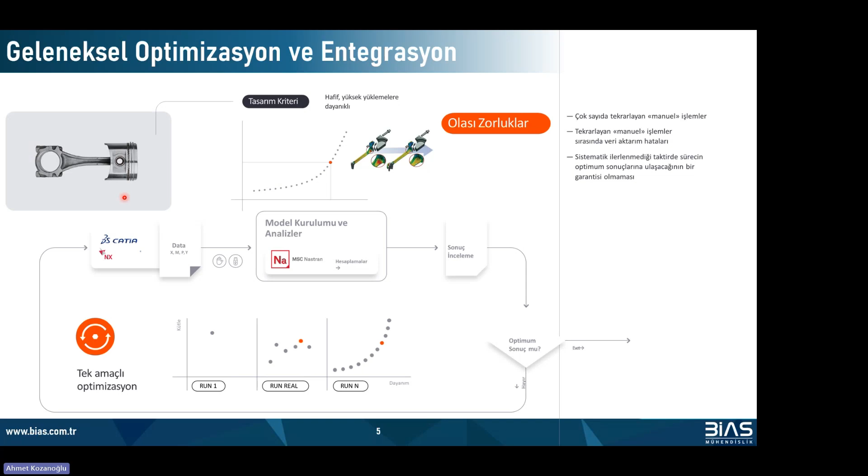Because of this, we can continue with modern optimization tools. If you have one requirement, one design criteria for your structure, you can do it the traditional way. But if you have more design criteria for your structure, you have to use some modern optimization tool. In the previous case we mentioned only one design criteria, but in this one we have two different design criteria. So for most problems and most structures, more than one output is examined for the optimum target of the structure. For example, for this problem, another output could be that it doesn't distort its behavior at high temperature.

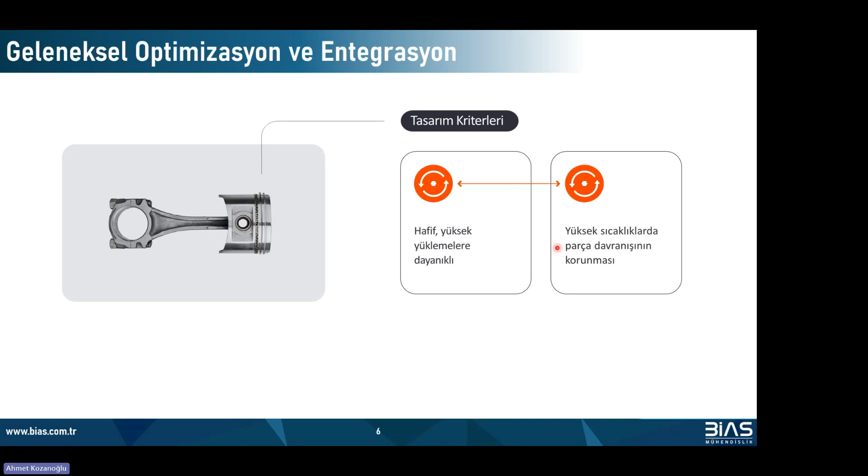So for modern optimization and integration, we are using pSeven software. pSeven software has three products: one is pSeven Core, the other is pSeven Desktop, and the last one is pSeven Enterprise. P7 Core can be defined as a Python integrated library, a program without an interface, and users can access and use all the algorithms and techniques in it. For P7 Desktop, we have 4 steps, or legs. Firstly, you integrate your workflow - you can use a CAD tool, a CAE tool, and integrate all of them into P7 Desktop. After integration, you can automate your process, and after automating your process, you can obtain optimum results.

For example, you want to decrease the mass of your structure, so you can get an optimum result. And you run, for example, 100 analyses in P7 Desktop - you can get 100 inputs and 100 outputs. So you can use this data for your prediction modeling. The last one is pSeven Enterprise, but in this webinar we will continue with the P7 Desktop version.

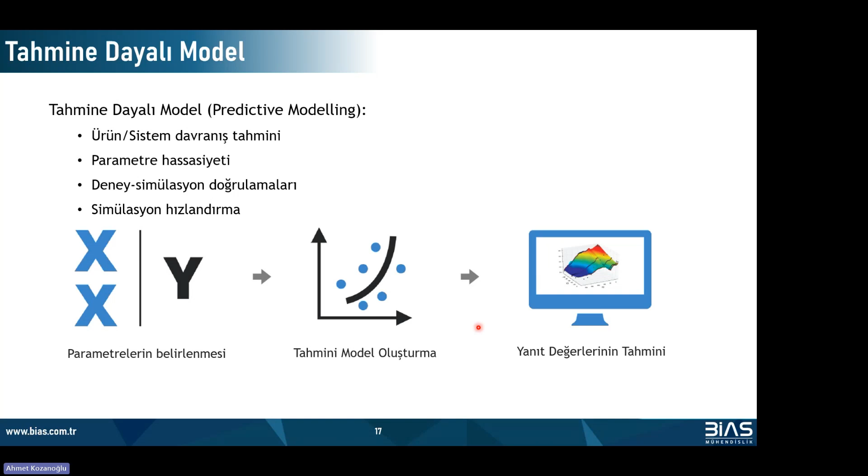Even if you have test data or lots of analysis data, if you have both input and output for your system, you can create a predictive model in pSeven and predict your results within seconds.

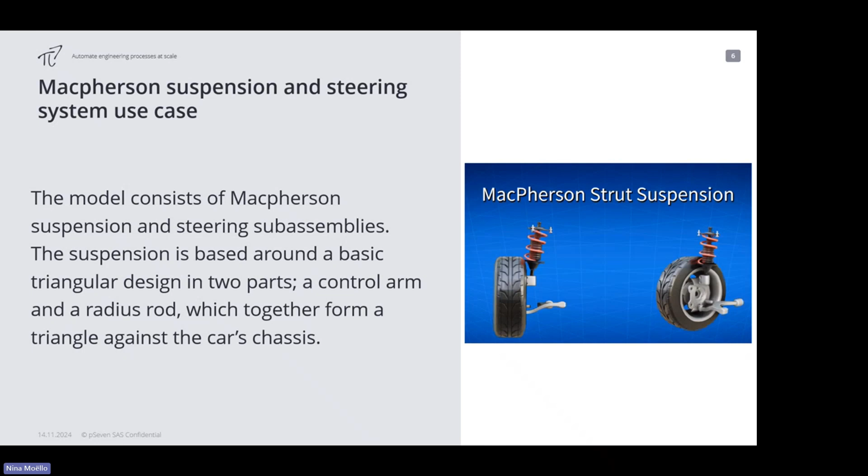So it consists of an assembly of suspension and steering. The suspension is based around a basic triangular design in two parts. So this is basically here. Okay, so we have a control arm and a radius rod. So these together form a triangle against the car chassis that we do not have on the picture. But this is widely used in the automotive industry, but still requires some refinements to be well designed and to provide some good performance to the car.

All right. So here you have another schema of the same tool, same system. And the objective for today is to provide, of course, a stable and safe car. And to achieve this goal, we have two different sub-goals, let's say. The first one is to minimize the camber angle beta, which is here. Okay, by minimizing this camber angle, it will allow the tire to stick to the ground.

Okay, so you have the maximum surface of the tire which is in contact with the ground. So then you have a more stable car. But we also want to minimize the roll center height difference between minimum and maximum values. So this is basically this distance here. And this one will enable us to have safer cars, or again, more stable and safer.

In order to play on those two aspects, we have 3 lower control arm points. Okay, so I told you that we are talking about a small triangle on this geometry. So this is exactly what you have, in red here and here on both parts. Okay, and the control arm points are those PF, PO, and PR that you have. So the front hardpoint, the outer hardpoint, and the rear hardpoint here.

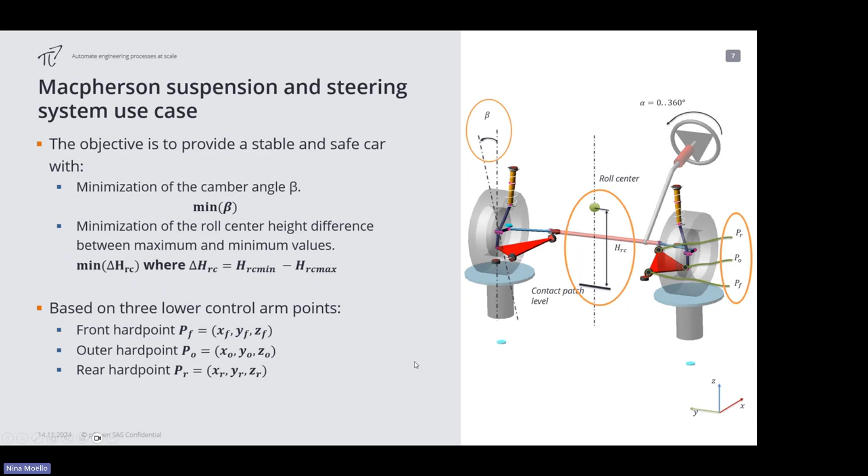Okay, and for each of those hard points, of course, we have the coordinates, so X, Y, and Z. In total, it means that we have 9 variables and basically 2 outputs, so 2 objectives. So with this, we basically designed everything in Adams. Okay, so the simulation was made with Adams Car, which provides reliable simulation tools to model this kind of system, so regarding the automotive industry.

But on Adams Car, the optimization capabilities are limited. Okay, it provides quite okay design space exploration and so on, but with pSeven, we think we can provide more than that with machine learning capabilities. We will see that right after. And on top of that, the problem here is multi-objective optimization. We saw that we have 2 different objectives with the aim to find the best compromise between those 2 objectives, which are conflicting criteria.

By conflicting, I mean that if one of the criteria is minimized, it's likely that the other one will increase, and vice versa. So we have to find the best combination of the 2 criteria to minimize them both at the same time. On the other hand, it has many variables. We saw that. We have 9 variables here, and it's too much for an engineer to search manually for the optimal solution.

So this is why we rely on algorithms and automation here. To close the loop, the industrial context now needs fast and reliable study results. You basically cannot afford a large amount of time to search manually for the answers and implement that slowly. So in this general context, the question is: how can pSeven bring value in solving such a complex task?

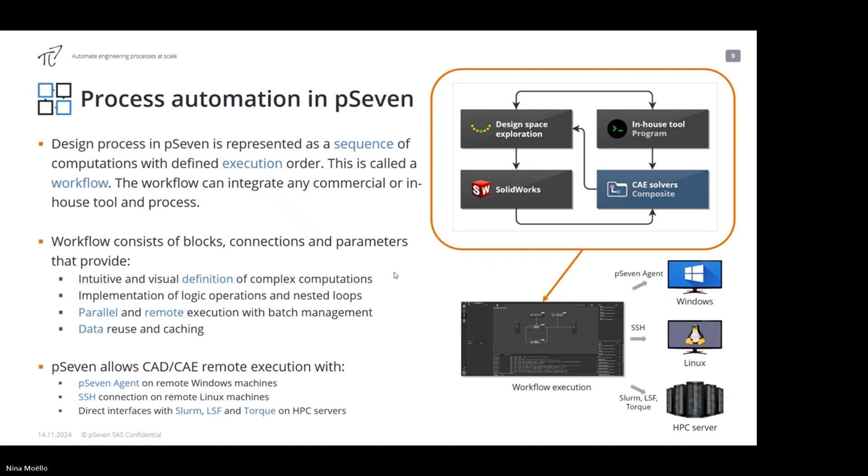So with this definition of process automation in pSeven, our goal is now to do the same with Adams Car. On the first step, the simulation was performed on its own with the Adams Car application, with the following settings for those who are interested. So basically, the engineer did a first simulation on Adams Car to set everything up.

At each simulation step, we are computing the delta H, this value here that we want to minimize in the future, and the beta value as well, so this camber angle here that is also to be minimized. You have those parameter calculations for one full model execution, and in the end those values are just computed for every time step, so we ensure that the model provides the good output.

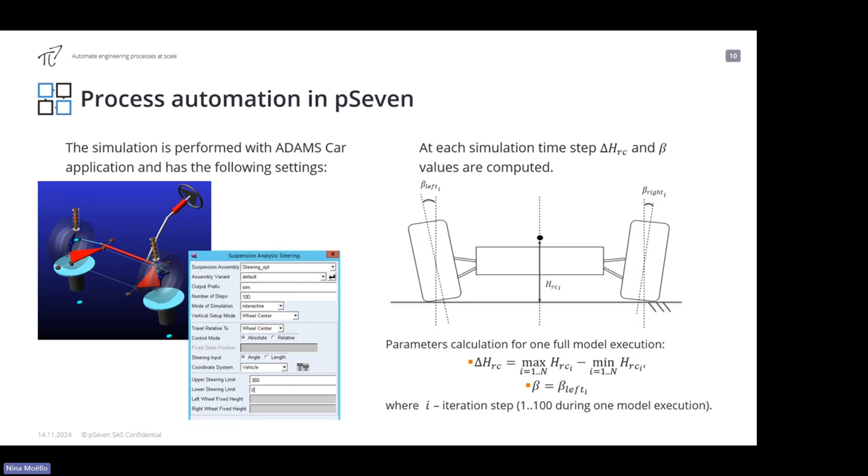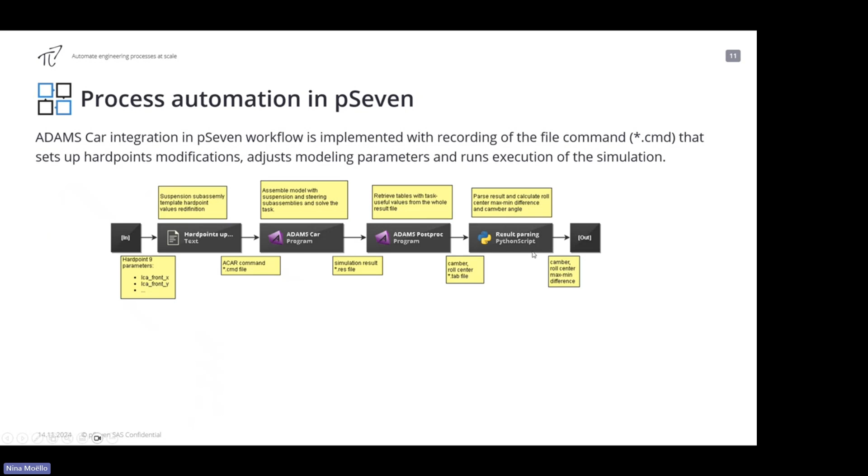And then we basically build such a workflow. You see here the workflow has a different shape. So your workflow can represent basically any engineering process, and you can be quite creative to customize your own workflow. Here in this workflow we have 4 blocks, 4 main steps, to integrate this Adams Car.

So let's start with the first two. Like Ahmet said, for simulation tools you can access different input files, and in our case the input file will be the CMD file. So we have one Adams Car simulation and one small file which defines the different steps of the simulation properties. In this simulation properties file, our goal is to redefine the hardpoint values, so redefine our front, outer, and rear point values, like you have here in blue, through some small commands.

This is done by the first text block with powerful text parsing capabilities, with a no-code process, so just by selecting your value with the mouse it will be changed automatically. Then the second block is the Adams Car program, which opens the assembly, the .asy file, and updates the hardpoints based on the command we just defined. So this is what is said here: all actions are performed in accordance with the predefined command file.

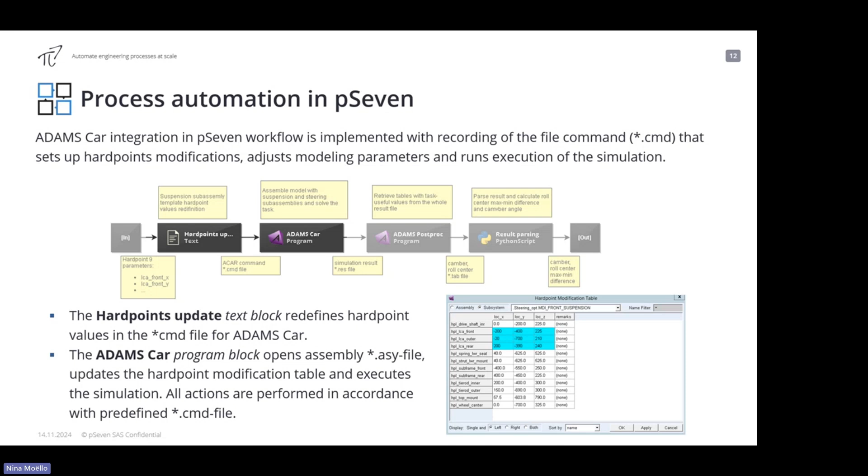pSeven manages the ADAMS Car execution. Once it's done, we then switch to the next blocks.

The ADAMS Car post-processing is made to export some tables with the task-related values, so this delta H and beta values, through execution of the predefined CMD file.

So again, here we just continue the process with some post-processing tasks. And in the end, we retrieve those kind of plots here, right? And with a small Python script, we are just parsing the results, computing the final value out of those tables, out of those graphs, to go back to pSeven with the exact value of delta H and beta.

So to summarize briefly the whole workflow: we modify the command lines to modify the input of the hardpoints. Then we launch the process of ADAMS Car. We post-process a bit to output those graphs. And by using those graphs, we then just gather the final value of delta H and beta.

So with this workflow, you basically have a standardized process which will take as global inputs your new hardpoint values and which will print as outputs the camber, roll center, and min-max difference.

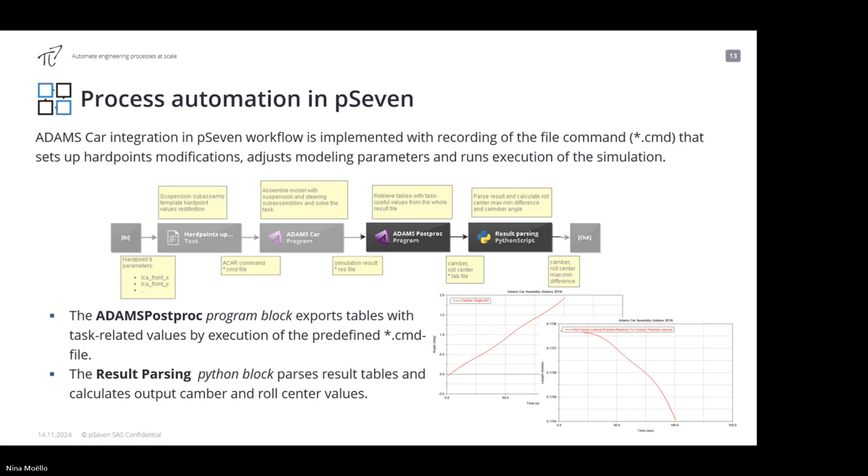This entire tool, or entire object, is just the automation of a complex engineering process. And it's also made to avoid manual and repetitive operations.

Because again, like Ahmed said, when you are dealing with manual operations, you are facing some human errors, just forgetting about one file or one value or misreading something. This is totally normal. But with pSeven here, we ensure that the process is the same for every task.

On top of that, the workflow provides a visual representation of the process. So if you want to share this project with someone else, this second person can directly see what has been done and understand more clearly without going into the details of the simulation.

So now that we have an automated workflow, our goal was to optimize this design. How can pSeven optimize such a task? Well, we have different algorithms and different techniques to tackle those problems, some including machine learning or more traditional methods.

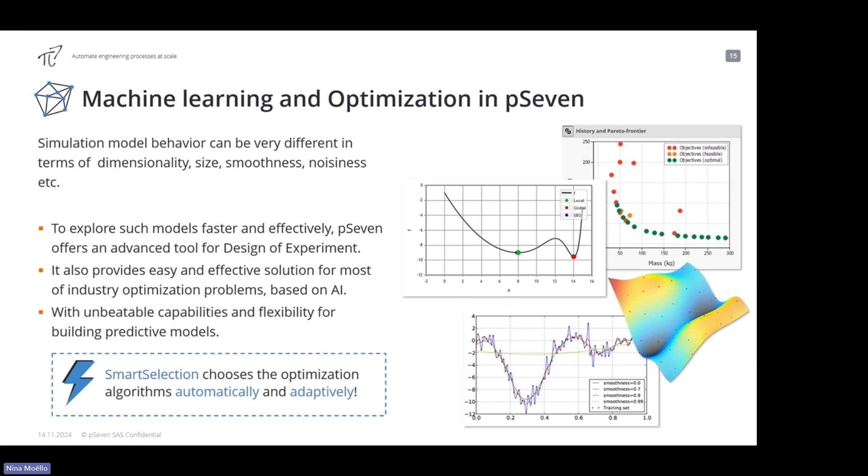We saw that pSeven is applied in different domains. So this is where this comes from: it's based on AI. And also it has unbeatable capabilities and flexibility for building predictive models.

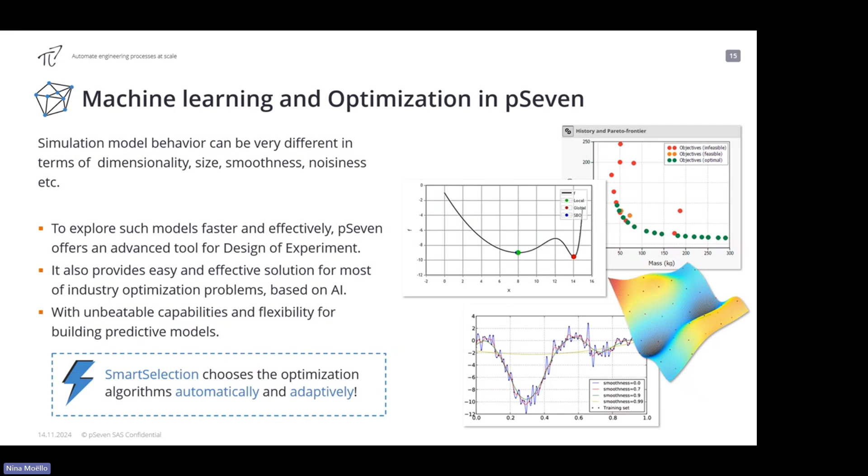This is not our goal for today's topic, but if you have some questions, I would be happy to answer about machine learning. And on top of all those capabilities, we have the smart selection, like Ahmed showed you, which helps choose the best technique if you're non-expert in mathematical techniques.

And to control this workflow now, we do not provide inputs from the user, but from pSeven directly, from the Design Space Exploration tool. This tool will also gather the results to have this kind of loop.

We are now in the evaluation mode, which means that we do not have any specific targets for those responses. So the smart selection algorithm provides the technique of Latin hypercube sampling, what we call LHS, to just explore correlations between input and output parameters. For the moment, we asked for 300 points.

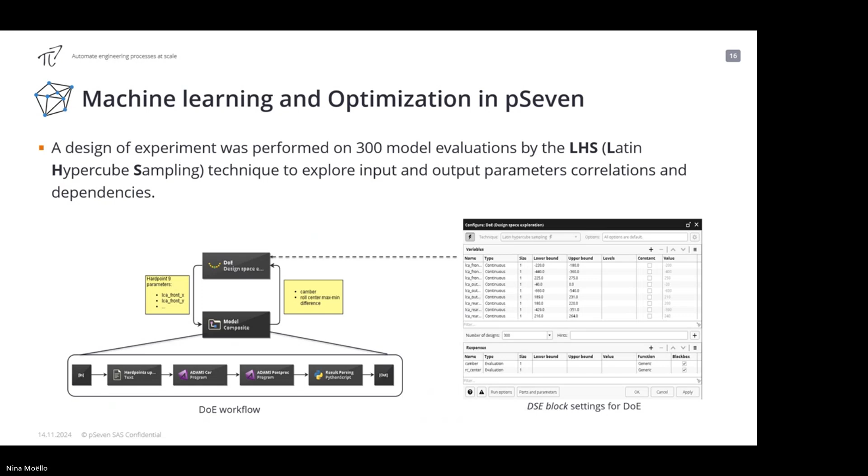Okay, so this kind of workflow is adapted for Adams Car. But at pSeven, we provide very different connectors. So those blocks relying on Adams Car simulation could actually be replaced by another program. So if you're using, say, ANSYS Fluent, we can definitely work with ANSYS Fluent with the same process. We are totally agnostic to any software, so we work with ANSYS, Hexagon, Siemens, whatever the software, even in-house software, in-house codes.

Can it be exe files or Python scripts or MATLAB, whatever? We can integrate any of them. Then just by having a workflow like that, which can automate your process, you can plug on top our algorithms for optimization, design space exploration, and so on. So yes, no problem with CFD.

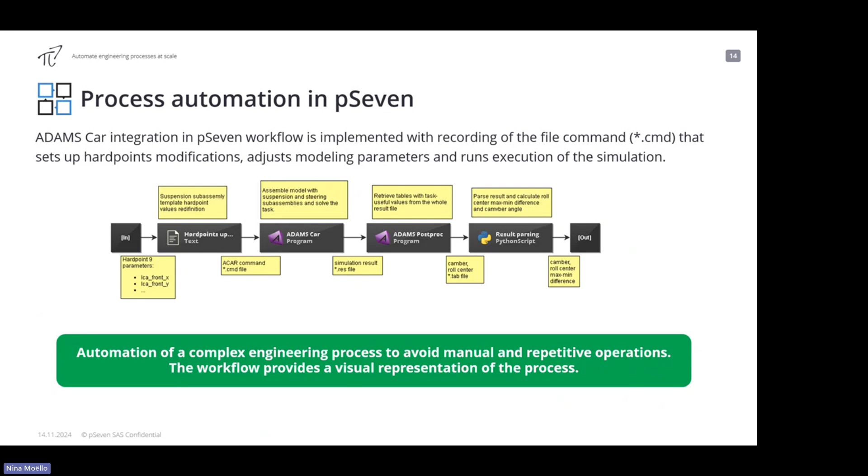So can pSeven work as a plugin for CAE and Adams? Sorry, let me exit to have a better view of your questions. So plugin in CAE or Adams integrate - if I understand the question, it means can pSeven be launched from Adams, right?

Yes, so not at the moment. We don't have any strong partnership, let's say, with Adams. Maybe they have a connector, but in our case, our process is to integrate Adams within pSeven and then to work from pSeven.

I think there is no question in the chat panel. You can contact us for any question that you have later. So for the moment there's only one direction, at least that we know - it's Adams integrated inside pSeven.